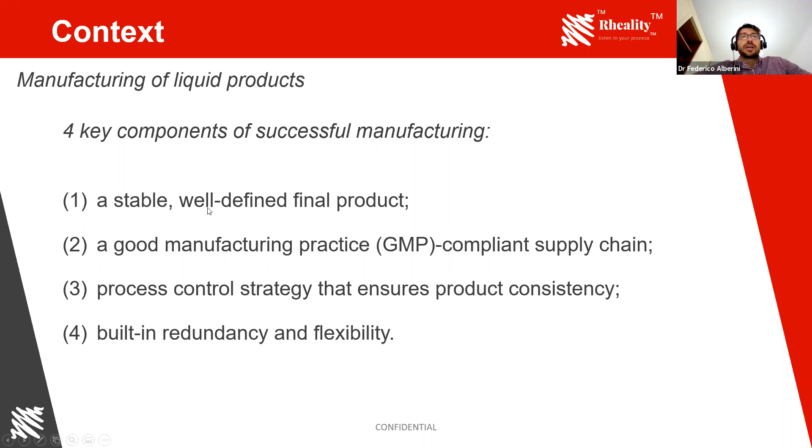What are the challenges in the manufacturing of liquid products, and in a way, the opportunities for Rheality? When you process liquid products, most of the time you have very complex products, made of different ingredients, sometimes different phases. And obviously all these complex structures, or microstructures,

basically give the final performance of the product, and that's what makes the consistency of this product challenging. Most of the time, to control and measure this microstructure, there are a lot of analytical tools employed to measure the different properties of the fluids - we are interested in rheology, but there can be many others.

However, to achieve such measurements, you need a lot of time. And obviously time is what in industry is not available, or is not something they're willing to waste. Controlling this microstructure is really important, because, as I mentioned, it will control the final consistency of the product, which in a way is the macrostructure of the fluid.

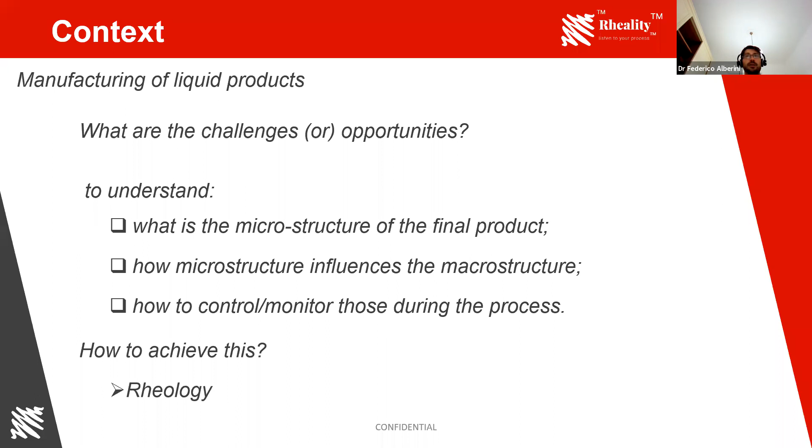For those not familiar, rheology, from a textbook, is the study of the flow of matter. Often viscosity is what most people know. However, viscosity is not the only information that rheology provides. Viscosity is the rheological parameter that describes a particular class of fluids, the Newtonian fluids. However, most real liquid products don't fall into this class, so viscosity is not always the best parameter to describe the rheology of what are called non-Newtonian fluids.

Generally, rheology is a very time-consuming measurement, because taking a sample, going to the lab, and taking the measurements, even if you are really good and fast, cannot be done in less than 30 minutes to 1 hour. However, this measurement can provide really rich information about the fluid.

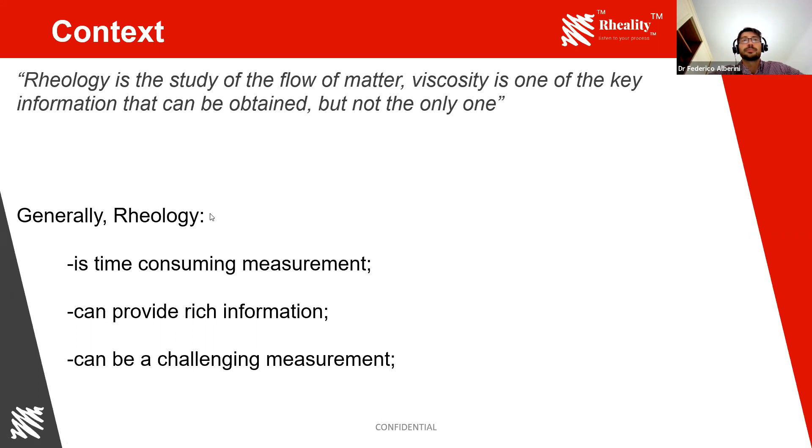So how does the technology itself work? The technology is relatively simple from an understanding point of view. As you see, A is the brain of the technology, which contains all the hardware electronics.

The electronics is simply connected to a sensor, which is a piezoelectric sensor, and this piezoelectric sensor is placed on top of a probe. This probe acts as a sort of antenna that captures the measurement, or the events that happen inside the pipe you can see at the bottom of the slide. You can imagine the fluid comes in from D and goes out from E. Basically, the flowing of this fluid inside this pipe section, hitting our probe, provides these rheological measurements.

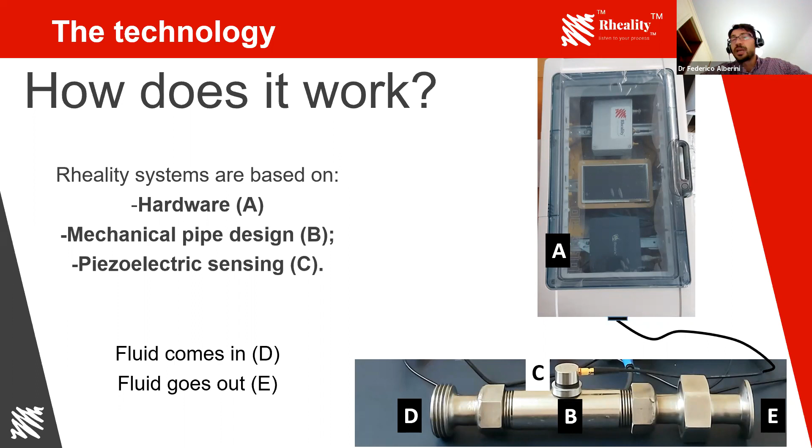The great advantage is that the sensing part is never in contact with the liquid, and this allows us to work with most of the aggressive fluids that can be used, because the material of the probe can be made exactly the same material as the piping, despite it being a metal.

The other good thing about the technology is that we use a sensor technology that is well-established, so it's not a completely new sensor. It's a passive acoustic sensor, which is often confused with ultrasound. The main difference is that with ultrasound there is a receiver and a detector, while with passive acoustic you mainly only have a detector. So you overcome all the problems that you have with ultrasound.

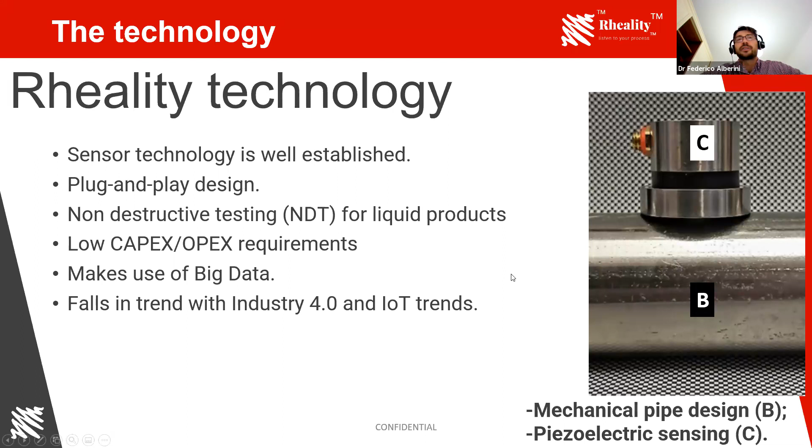The technology is quite plug and play, because as you've seen in the previous slide, it can fit easily into any pipeline. You just need to change a small piece of pipe with the pipe provided by us with the probe. It has relatively low capex and opex requirements, and it makes use of big data, which we are going to talk about in the next few slides. Our aim is to provide a technology that can enhance Industry 4.0.

To simply explain the basic principle of the technology, I decided to show you some simple computational fluid dynamics that we have done with colleagues of the AMTECA team at the University of Birmingham. We simulated the flow inside the pipe section I showed you before, and we tried to provide a physical interpretation of what is going on in the measurement itself.

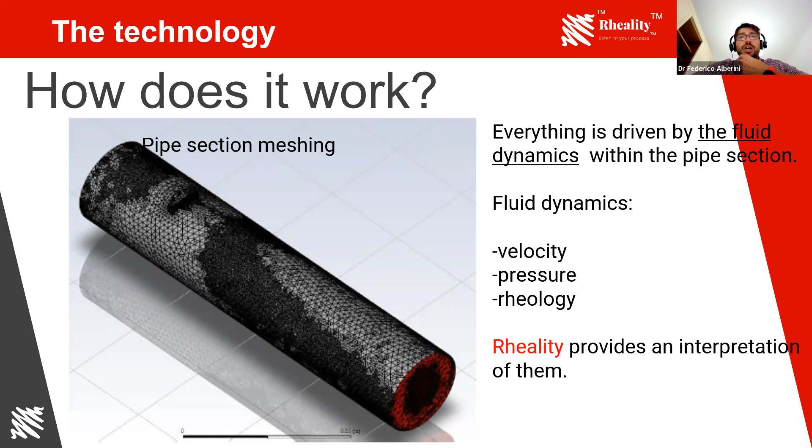So imagine this image corresponds to the cross section of the pipe that I showed you before, exactly in the middle. As you can see, from the left is where the fluid is coming in the pipe. Then the white rectangle is the part of the probe that is extruding inside the pipe section. And what we basically got from this study is what we believe was happening in the measurement itself.

What happens is the fluid flow hits the probe inside the pipe, and if you remember basic fluid dynamics, the fluid flow is pretty dependent on the apparent viscosity, or more generally the rheology of the fluid flowing inside the pipe. In simple words, the distribution of velocity, represented in this slide by different colors, changes according to the rheology of the fluid.

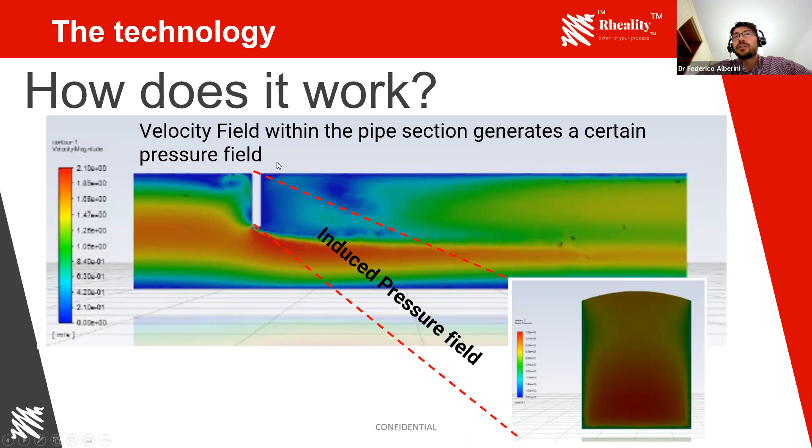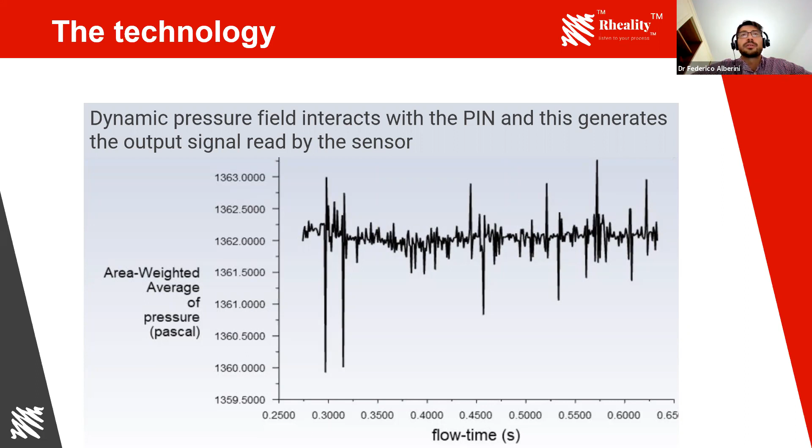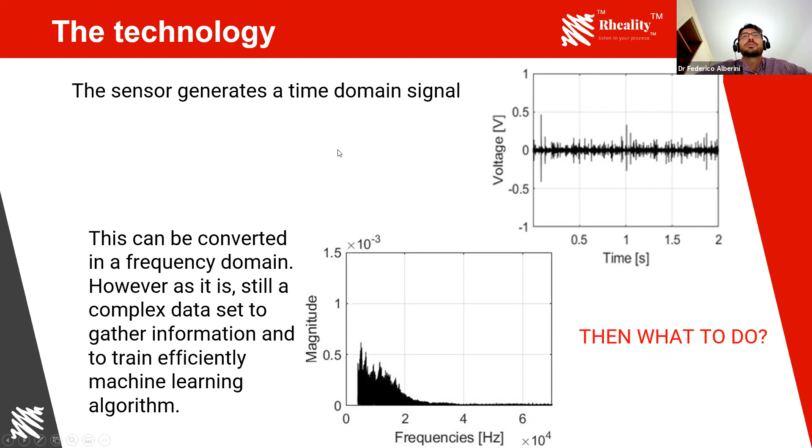We developed these Rheality outputs, which we call Rheality Rheological Factor, RRF. What they are is a simple sequence of parameters that basically describe the complex, rich, and heavy frequency distribution data provided by the raw data from the sensor. This sequence is a way to basically identify the rheological fingerprint of the desired liquid that we are analyzing.

And these 10 parameters can be used in a much easier way, because you can think about that the first raw measurement is for each instant in time - we are talking about 500,000 data points, and these 500,000 data are reduced to 10 parameters. So also from a computational point of view, this opens a lot of doors.

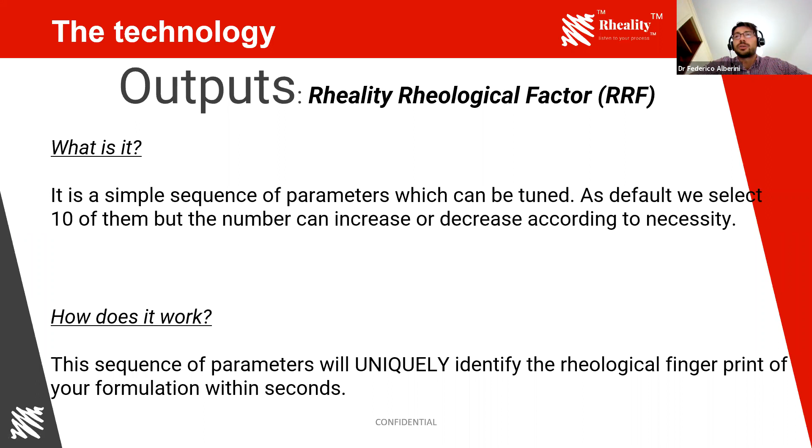Please change. So to explain the Rheality Rheological Factor, you can think about DNA sequencing. You know that every one of us has a different DNA sequence, and there aren't infinite nucleic acids - it's just a sequence of these nucleic acids. The RRF is similar in a way. We have these 10 parameters that can have different intensity, but the combination of different intensities describes a particular rheological fingerprint. This information can be used live and inline pretty quickly.

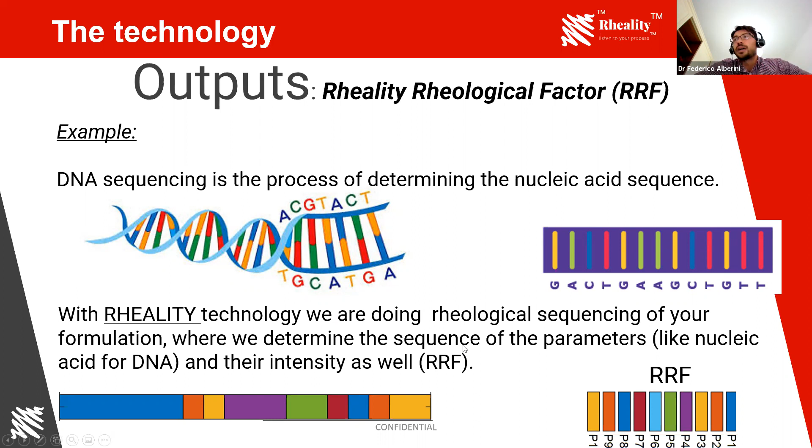Okay. So the advantage of using the Rheality Rheological Factor is that these raw Rheality measurements can be fed easily to a machine learning algorithm to train, because obviously we face that different customers have different needs. Not all want a rheological characterization of their fluids, but they want a specific process parameter to be identified. So we can use machine learning algorithms, feeding our RRF data to convert to specific outputs.

At the same time, because the amount of information is not huge, even the raw Rheality Rheological Factor can potentially be used in a process control system, because it's like having 10 temperature or 10 pressure readings, but it's just 10 parameters. And the good thing is there is a drastic reduction of the amount of information, but there is not a proportional loss of the richness of this information itself.

Please change. Coming to my last slide, I will give the privilege to Francesco to continue the presentation. What I would like to conclude from my part is that what Rheality is aiming to provide is smart sensing that can provide the industry a real sensor that can really enhance Industry 4.0. This is because Rheality can provide a lot of information - it's not only about rheology, it can provide others that in a way are directly linked to the rheology.

What we aim is to provide a technology that has efficient communication, one that can be used with standard communication, but also with more advanced methods through cloud or wireless. Our aim is also to help industry make this change, because there's a lot of talk about Industry 4.0, but implementation is not as straightforward as it looks. As a company, we work closely with clients to help them through this step change, because at the end it's a big step change.

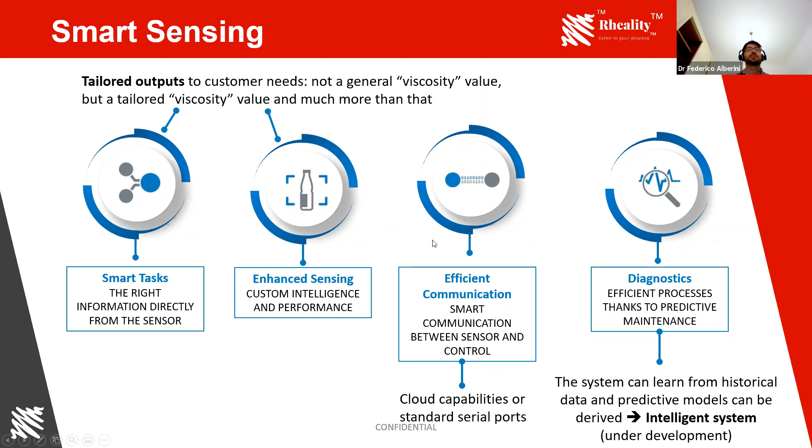Okay Francesco, I'll leave you because I think I've taken enough of my time. Yeah, thank you, and I'll continue with a more general view of the technology.

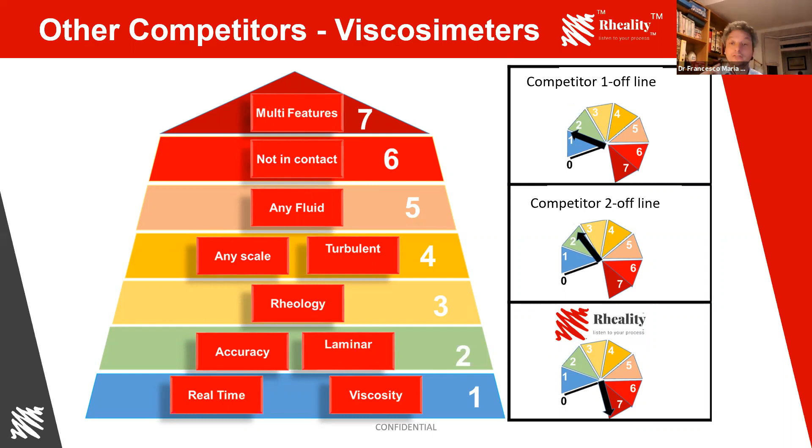So we can move up to rheology. We can be used in any pipe with any scale, so size doesn't matter - we're not restricted by size. We're not restricted by fluid regime, so we can also be used in turbulent regime. We are fluid agnostic, so it can be multi-phase, Newtonian, non-Newtonian, and as mentioned by Federico, it's a touchless technology - the sensor part is external to the fluid, which simplifies many operational things. We are also multi-feature, so a single sensor can provide more than one measure, likely because the richness of the signal allows us to extract different features - it can be viscosity and rheology, for example. Not just one sensor, one measure, but one sensor, multi-feature.

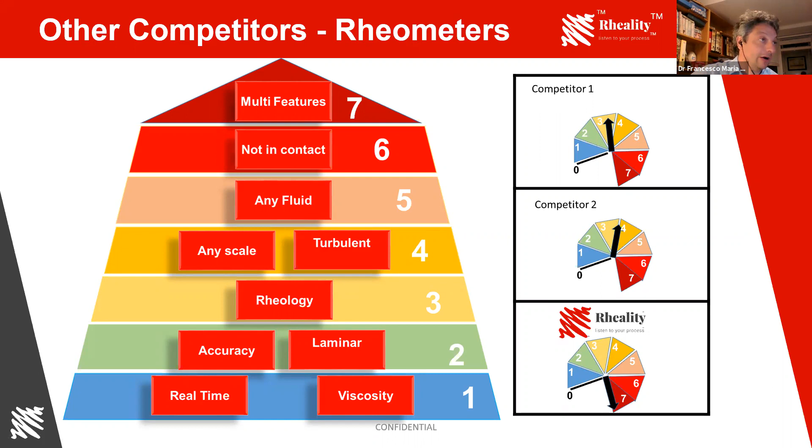Let me explore these concepts a bit more. The first feature is shifting measurements from sampling and measuring offline to inline. We go from a process that, even in a very skilled and fast environment, can take half an hour every time they want a measurement, up to hours of offline measuring time, to by-the-second measurement - real-time, inline measurement. That's the first feature and characteristic.

The other feature, as I mentioned, is that the sensing part is actually outside the fluid environment, so there's no complication with the sensor that can be used. We can go inside the pipe with any material - it can be the same material as the pipe, as the process we're dealing with. There's less maintenance, since everything is plug and play. We can deal with the piping system alone, or the electronic part alone, depending on the maintenance needed.

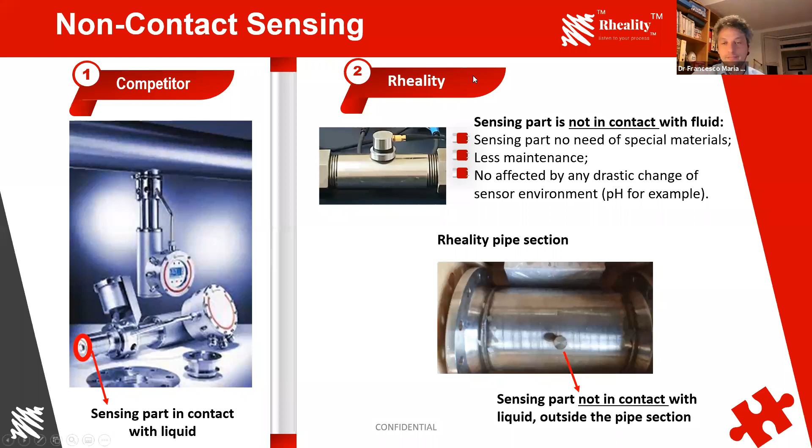We are not affected by the type of fluid, so there is no clogging, even if it's a harsh environment with high pH, we are not affected by this. So there are lots of benefits to being outside, and we know that other instruments have instead this type of problems of clogging and sensor replacement and damaging, etc.

So basically, when we consider single continuous phase fluids, the offline competitors, beside the issue with timing of those measurements, yes, they can do it.

For what concerns the inline technologies that are available, they can be restricted by the type of fluid they can operate on. For example, one needs a conductive fluid to work in both situations, single phase or multi-phase. Another one can work in single phase but cannot work in multi-phase. Well, again, we are agnostic to that. We can work with single phase fluids and multi-phase fluids.

Again, with multi-phase, we are currently working with up to 4 phases, where there is gas, water, viscous oil, and also particulates of solids. So this is just, again, a representation of complex multi-phase fluids.

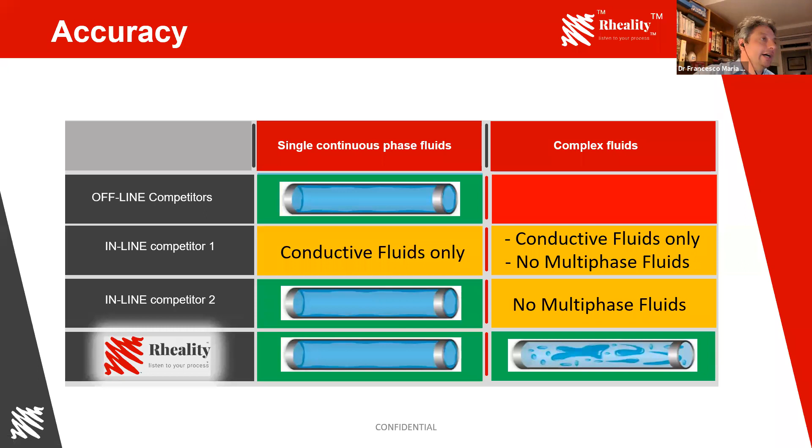In terms of size and fluid regime, everyone can work on laminar flow. When it goes to turbulent, the other technologies don't apply. And in terms of sizing, it doesn't matter for us, really. There are restrictions on the other technologies, they have upper limits. The biggest size we are working with at the moment is 10 inches, but going higher wouldn't be a problem.

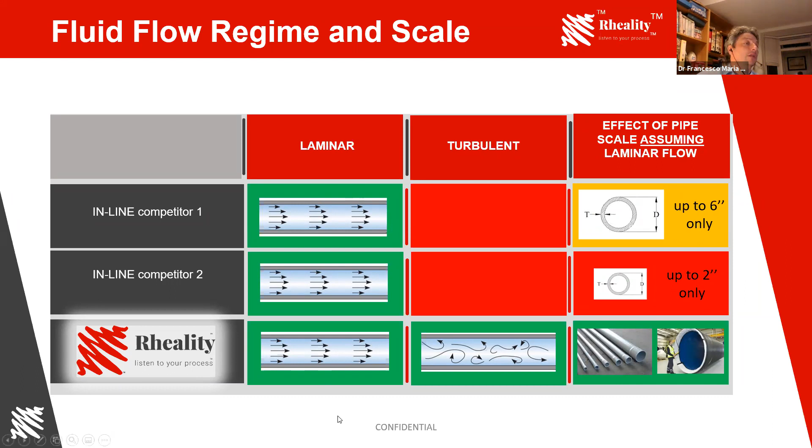This is also to give you an overview of the trials we are involved in at the moment. This is also testimony of the fact we are fluid agnostic, and also agnostic to working conditions. We have trials in these different sectors, and already working in Europe, UK, and the US.

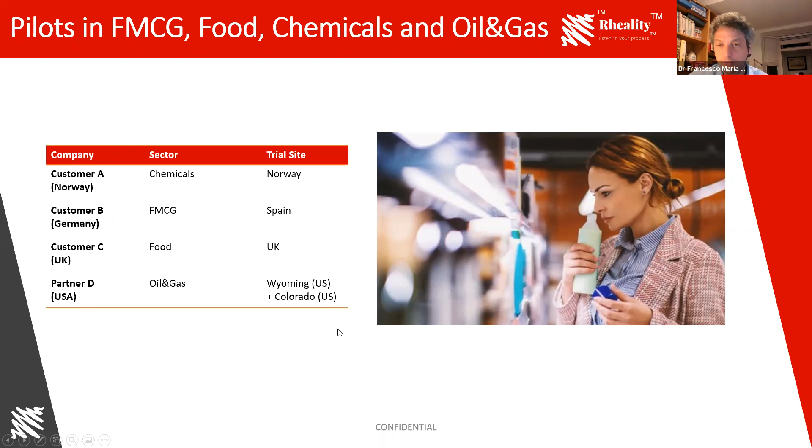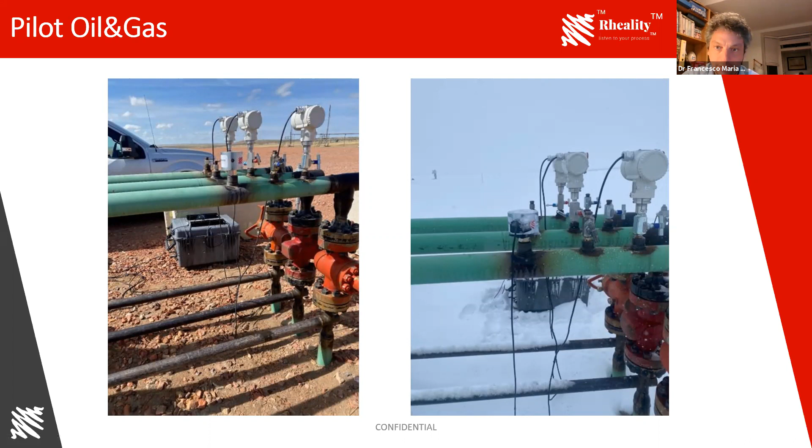This is just to give you an idea of the reality of Rheality. This is the oil and gas application, and the site is the same site 24 hours apart. So this was a Wednesday and a Thursday of the same week, in March in Wyoming. In the desert, one day it was sunny and dry, the second day was snowy. But this is the environment we're working in, and we are currently applying the technology to.

So I think that's the end, and I will welcome any questions, please.

Thank you, thank you very much, Francesco, and Federico as well. I've got a few questions I can ask you. Perhaps if I could start with you, Federico. You mentioned about training of a machine learning algorithm. Is that specific for each use, each different application, different type of mixture of fluids and solids and so on? And is your device self-learning in an application?